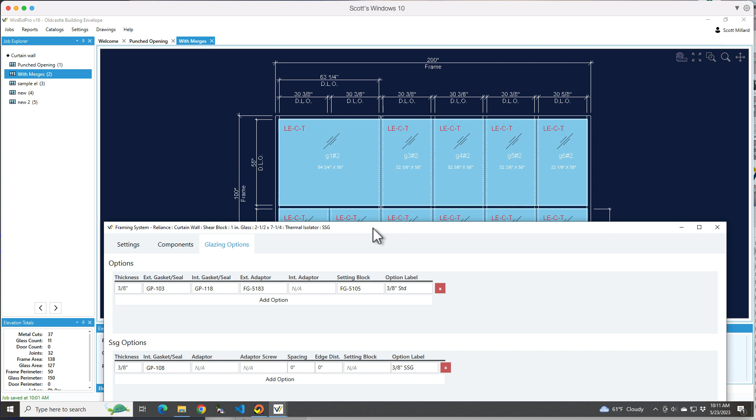So that's good, but if you want, for some reason, the horizontal adapter to extend into the glass pocket a little bit, but not the vertical, because that would kind of butt up against it, then you can tell it I want to add a 1/4 inch to each horizontal adapter cut. And it's going to basically do that and extend it into the pockets.

So then there's a setting here for the SSG adapter, and this is for the extrusion, where if it needs to be used in only one instance per member.

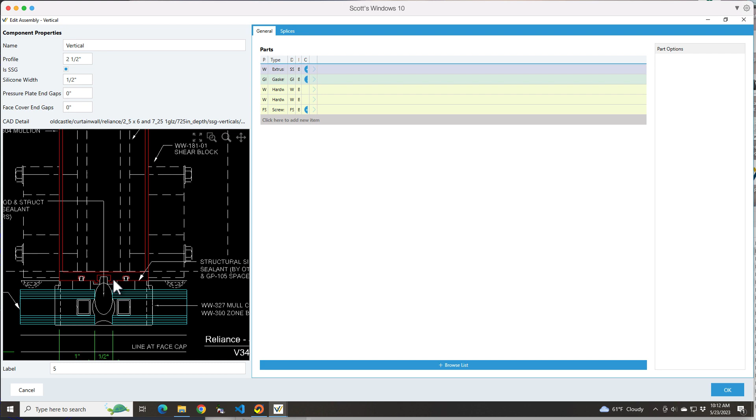So basically, if we went back to this SSG vertical detail here, we see that we have 2 spacer gaskets - that's good. But if there's some kind of adapter that's being used in the frame and it needs 2 of those, and those are extrusions, then that other setting that we were looking at...

Let's see, or actually if it only needs 1, so it's going to give you 2 automatically here, but if you only need 1, then you would check this box and it's only going to give you 1 cut of that adapter per usage on the vertical, or whatever member it's on.

So that's kind of the settings. They're kind of advanced.

Vertical adapter runs continuous, so that's if you want - there's another setting, so not just adding a little bit to the extra, but you could say for each vertical, instead of it just being the daylight opening, you want it to run the full length of the vertical.

Now you could always do that in the actual vertical component, but remember the difference here is you might have different parts required for different thicknesses of glass.

So with all these different settings, you should be able to calculate not only the cut size of the material, but have it based on the drawing or the DLO, while also being able to add and subtract to that to dial it in specifically to what you need for fabrication or installation.

So all those settings are here in this window. And keep in mind that I can just add more of these for 3/16, 1/4 inch, whatever, if it's a 1-inch system. So this is obviously for adding different glass thicknesses to a frame that is standard for a certain thickness. So in our case, this is a 1-inch system.

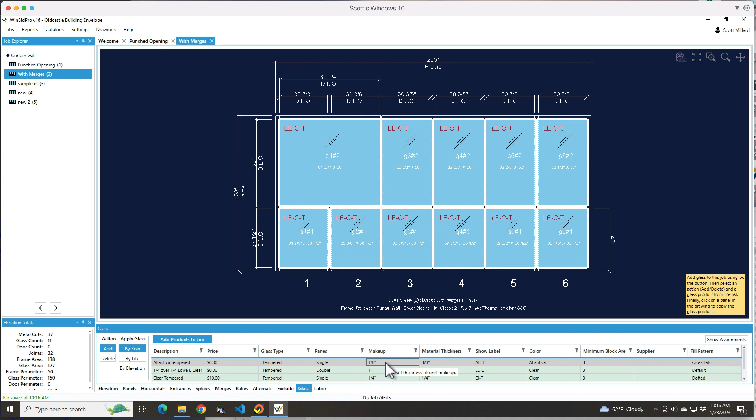The main reason to use glazing options is if you realize that you're going to be using different glass thicknesses in a certain elevation. Then when you add the glass, here's how that works, we're going to go to the glass tab. I actually have some 3/8 glass here that I've added to the job already. And if I say I want this bottom row to be 3/8 glass, I have to do it by row, and then I click it.

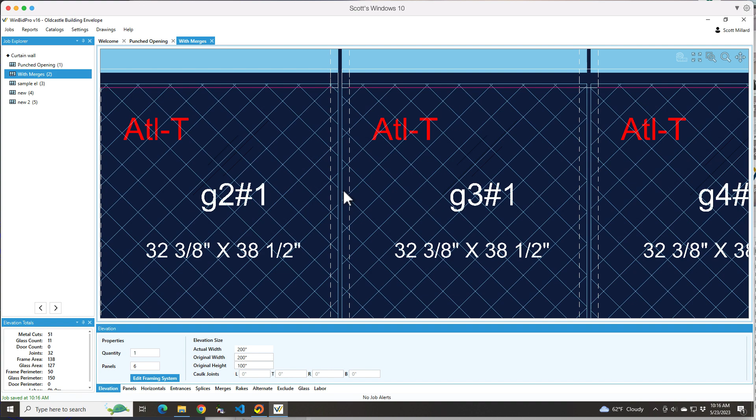So now when I go back to my elevation tab, it's going to show me the magenta lines wherever actual adapters are being used. So if I had an adapter part for the SSG glazing option that I created, then it would show an actual magenta line where these SSG joints are as well. But, or that's not the joint, that's actually the frame member.

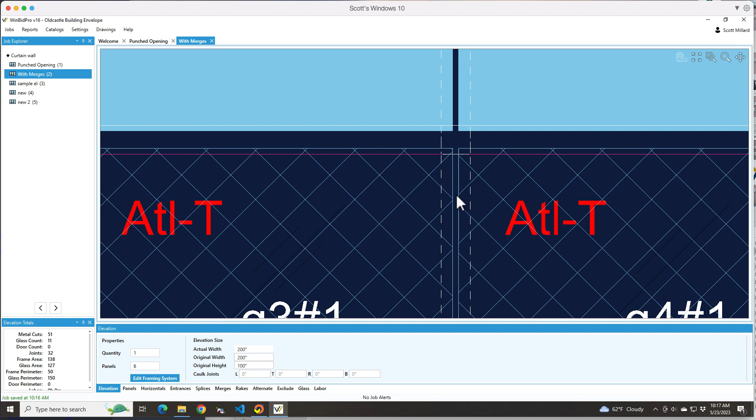So the dashed line here is actually the back member, and the SSG joint is this middle space here in between the daylight. Now I've got a different fill pattern set for this glass just so that we see it's different. And the glass tab lets you do that over here. There's a kind of a handful of different fill patterns that we can pick from. So that's why that looks different than standard glass, but it's something you can do.

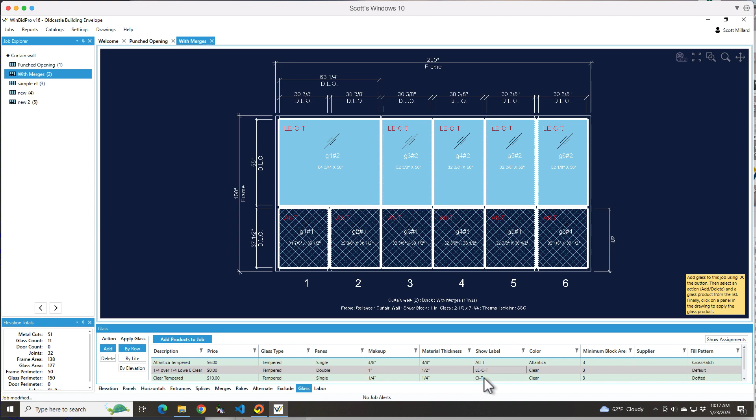You can also change your glass label, which is right here. You can change that and it would reflect a different label in red. So that's basically what the glazing options is all about. If you want different glass in a frame, it lets you do that with all the different components that are required for it. So that about covers it.